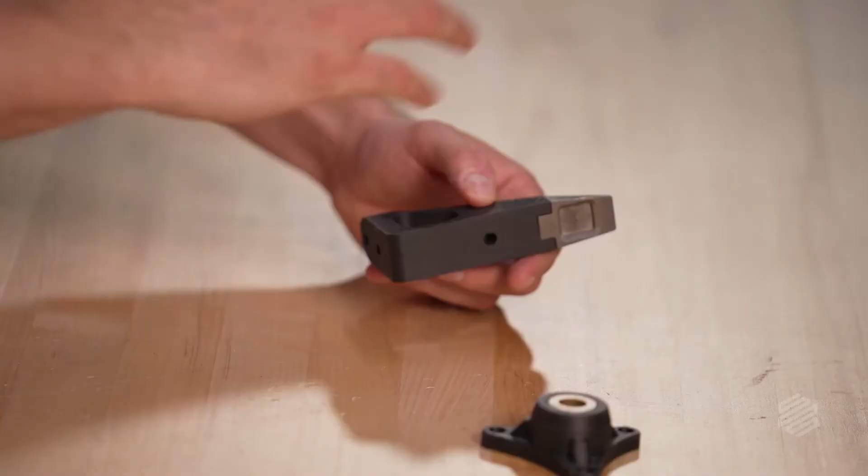Today we're going to be talking about strength, specifically how we can improve the Z-axis strength of our 3D printed parts. If you stick with us for a couple minutes, I can guarantee you that I can help you make some of your parts instantly stronger with just a little bit of redesign.

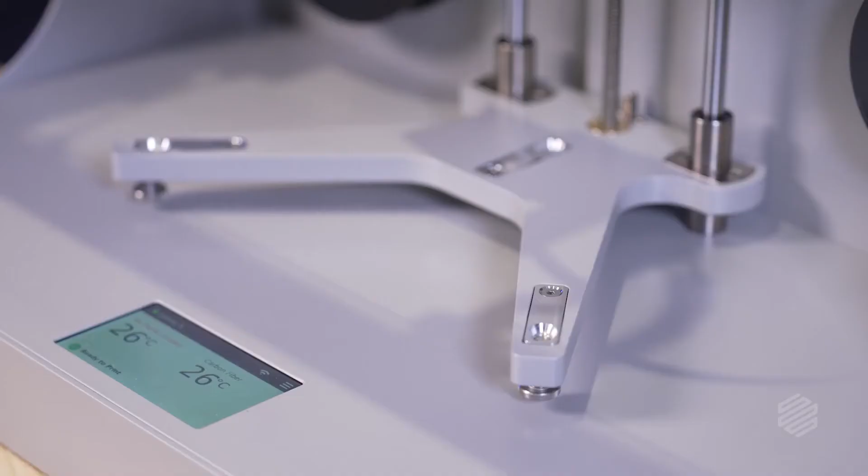So let's dive in. If you've been around 3D printing at all, you've probably heard that the Z-axis is weaker than the XY plane, or in each layer, of a 3D printed part. This can be a problem because you may not expect that part to have those different properties in different directions. You may expect to have a uniformly strong part.

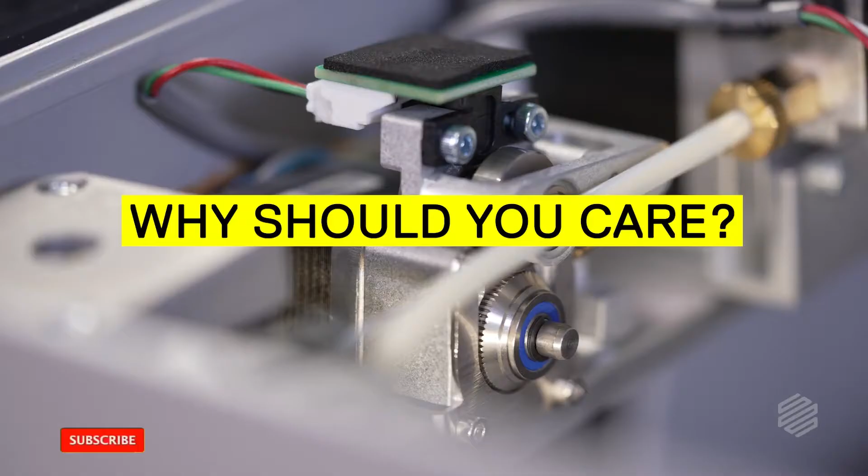So why should you care about the strength in the Z-axis? Well, you want to avoid broken parts. Imagine you were using a part like this and didn't realize that it didn't have enough strength, and you assumed it was going to work. All of a sudden when you put it into practice, it splits down the middle, cracks, and ruins your day. No one wants that, and that's why we need to think about how to reinforce those parts against those weaker axes.

Having stronger parts will mean that you can use 3D printed parts in more applications, give you more capabilities in those parts, and just generally make 3D printing a more useful tool in your everyday work.

So the first thing we need to talk about is this word, anisotropy: the characteristic of having different material properties in different directions or axes.

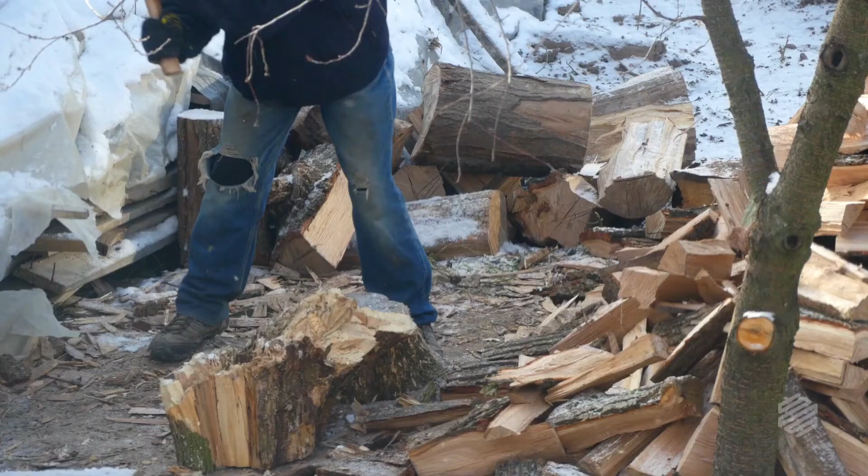A classic example of anisotropy is wood. Have you ever cut down a tree or split a log? If you have, you probably noticed that it was easier to split that log along the grain than against it. That's anisotropy at work. The wood is much stronger in one direction than another.

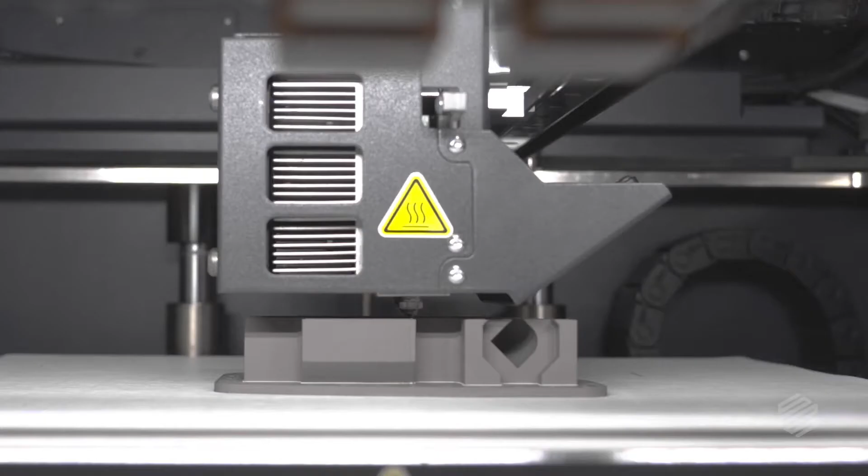Wood's just one example of anisotropy in nature, but you've probably run into others around you. And guess what? 3D printing is also anisotropic. I should be a bit more specific there, because there are some 3D printing processes that are more or less anisotropic than others. When we're talking about 3D printing today, we're going to be talking about filament extrusion 3D printing, like what you'll see with your Markforged machine, amongst others.

So if you're building a part layer by layer and extruding plastic or composite fiber into that part, you're going to see anisotropy between the layers. And this is where the classic example of 3D printed parts being weak in the Z-axis comes from.

So let's talk about why 3D printed parts have different strengths in different directions. It comes down to two things: material properties, and the geometric or physical bulk properties of the part. On the material properties side of things, we're really looking at how polymers bond together.

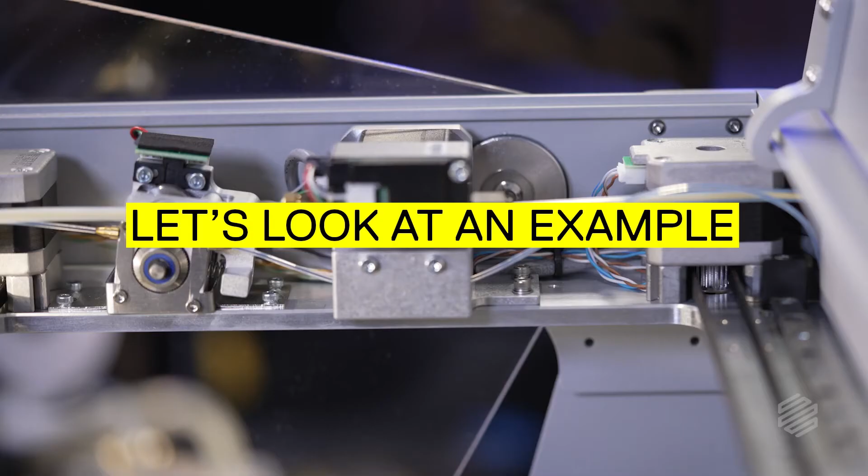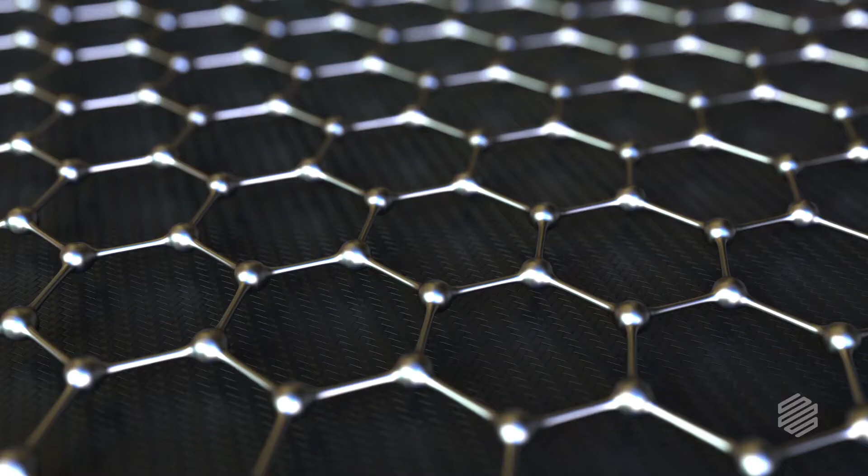Let's look at an example. We're building a part, in this case, out of a chopped carbon fiber and nylon material. Nylon's a polymer, and without getting too much into the chemistry behind it, that means it's a material made out of a lot of repeating chains of different chemical units.

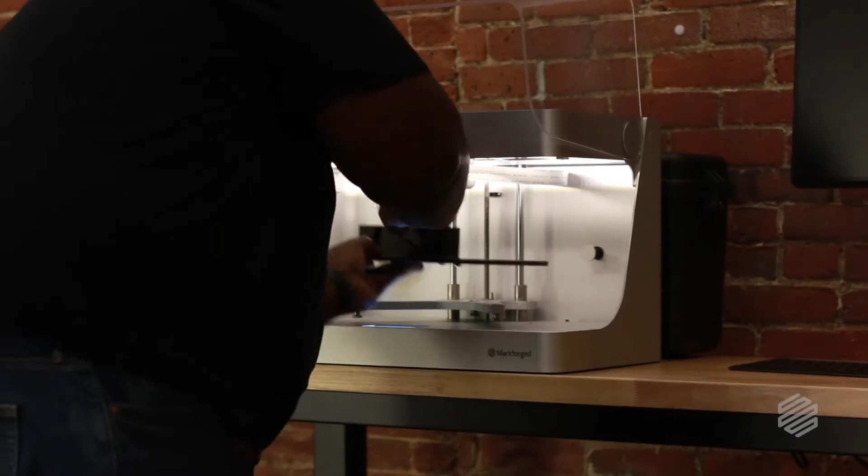And those chains, when you heat up that polymer and melt it, can actually entangle, and when it cools down, they're trapped together and form a really strong bond. This is generally what's happening when you lay down a layer of plastic in your 3D printed part.

Now the challenge is that if you fully melt the layer below it, you're going to turn your part into a puddle. So we have to balance the amount of melting that occurs between layers with preserving the integrity of the 3D printed part we've already done. That's the engineering trade-off we make in filament extrusion 3D printing. We're always going to have a somewhat weaker bond between layers than we will within the continuous extrusion path of a layer. Okay, so that's the first driver of anisotropy in your 3D printed parts.

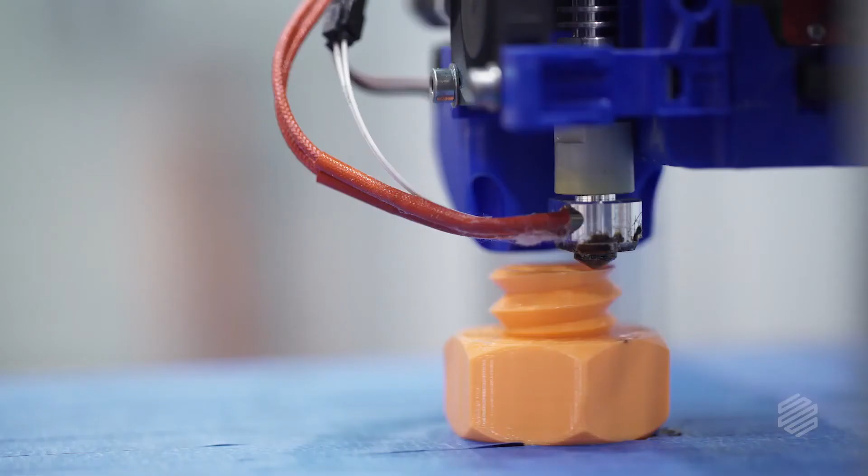But there's also a component that's due to the physical structure of the part. A couple areas here: one, we're building a part layer by layer.

So you've probably seen a 3D printed part and seen the layer lines, or the sort of scalloping effect, even if it's a very microscopic effect. If we apply a load to that part, those ridges and layer lines really concentrate the forces between those layers, which is the worst possible place for that force to be.

And because of that, that can act as a crack initiator, and it's the start of a part failing under loads or oftentimes impact. So the other thing we have to deal with is infill. For purposes of speed and using less material, most 3D printed parts are printed with a sparse honeycomb or triangular infill, but the downside there is you now have less material in that part.

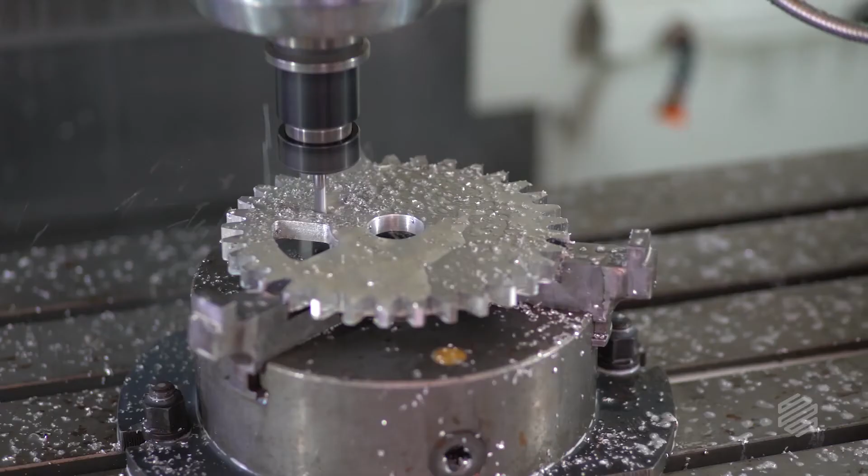So when we think about material properties of something like machined aluminum, it's often just a solid, homogeneous metal. With a 3D printed part though, because it's not solid, we also have to think about the strength properties that result from that infill. We have less material, so it's gonna have less strength in that area. And the combination of all of these things leads to anisotropy in our 3D printed parts.

So if we wanna make our 3D printed parts stronger in the Z-axis, we need to counteract the effects of this anisotropy. So that's what we're gonna do today. We're gonna talk about some strategies to reinforce your parts against these weaknesses that you see oftentimes in the Z-axis.

And that brings us to my favorite thing to talk about. So if you've been through our Markforged University course, you've probably heard me talk about functional requirements, but I'm gonna talk about them again. Y'all know I love functional requirements, and we're gonna do that right now.

So functional requirements are thinking about what it is that your part actually needs to do. What are the loads it needs to resist? What are the environmental conditions that it has to deal with? How does it interact with other parts?

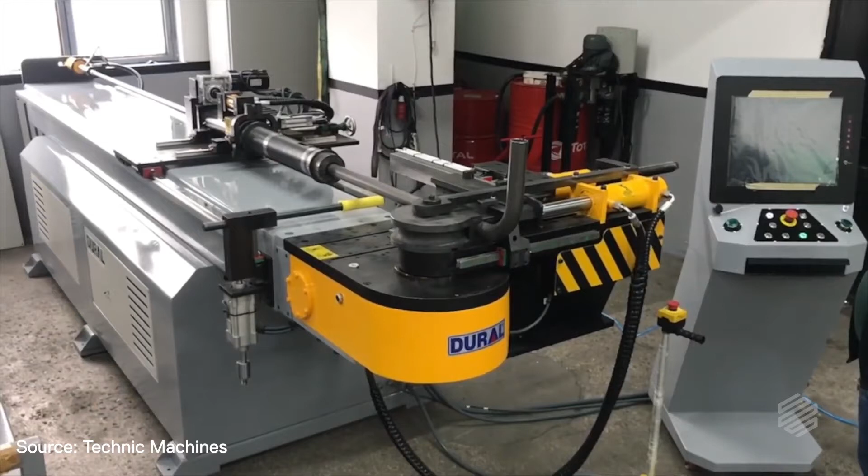As an example, I want to use this CNC bending die. CNC tube bending is a process where you use a CNC machine that can bend all kinds of different complex geometries into tubes and pipes. And a lot of times you'll need custom dies to get you the bend geometry you want. These dies can be expensive to machine and have long lead times.

So it does make sense to try to 3D print them if we can make the capabilities match the functional requirements of this part. So let's talk about what some of those functional requirements could be.

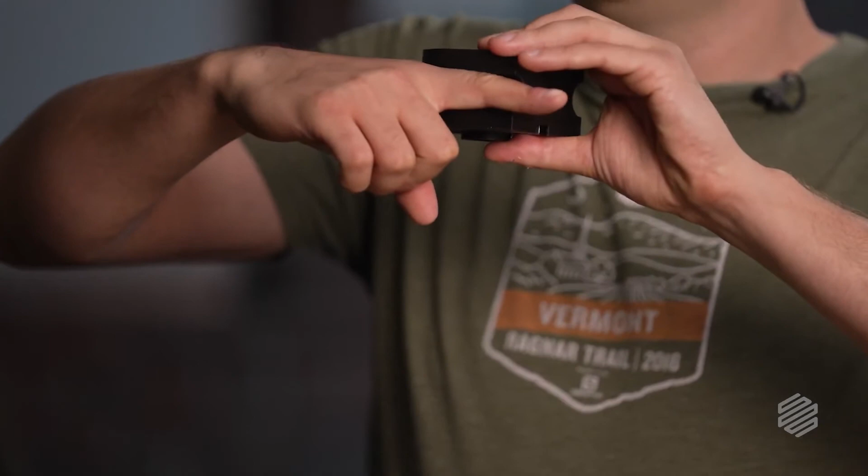So a CNC tube bender will take a straight tube and will bend that tube around this die. Those tubes could be steel, copper, aluminum, all kinds of different materials that can get formed by a machine like this. And depending on the material of the tube being formed, or the wall thickness and a bunch of other factors, there can be quite a lot of force on a part like this.

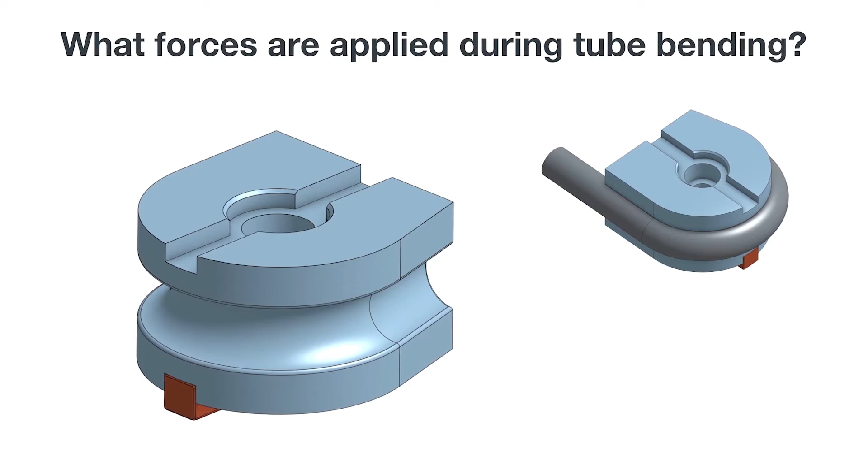So as the CNC tube bender forms this tube, it's gonna bring a tube in and then push it in against the die. And that's going to cause this die to want to separate or split in this direction.

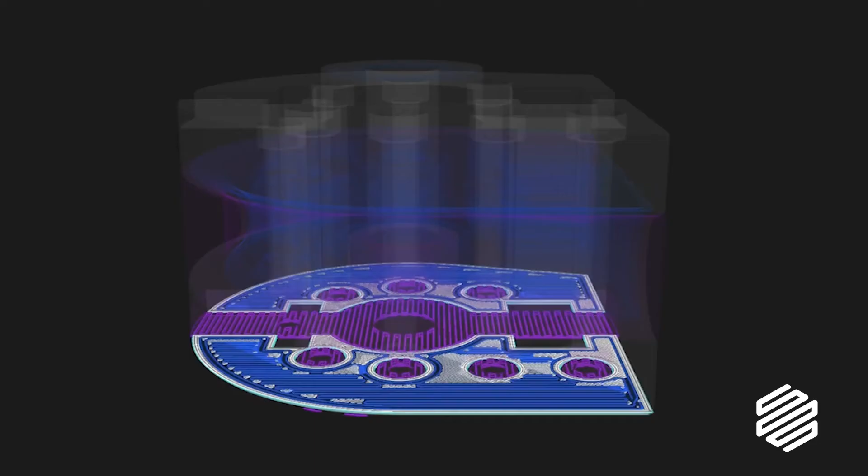So the first thing we want to figure out is where's my Z-axis? Because we can't know where the Z-axis or interlayer weakness is without knowing how this part was printed. So we want to know what's the print orientation. Well, in this part, we printed it like this on the build plate. So the Z-axis is going up this way, and our layers are stacked up and down like this. So that'll let us know where the layers in this part are and where that Z-axis weakness starts.

That means that our first functional requirement for a 3D printed CNC bending die is to make sure that this expansion force produced by that tube coming in doesn't split the part between layers.

So that leads us to our first strategy. If there's a force trying to separate the layers in the Z direction, and really it's producing an expansion force, the first thing we need to do is counteract that force. So we can do that with bolts.

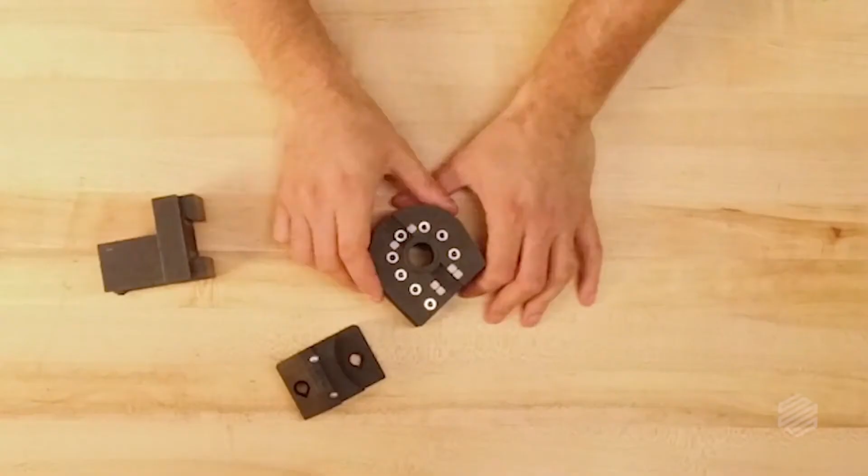Let's take a closer look at this bend die over here and see what that looks like. So you'll notice the first thing I've done is that I've put captive nuts in pockets along the bottom of the part. And on the other side, you can see that I've driven bolts all the way through the part that thread into those nuts.

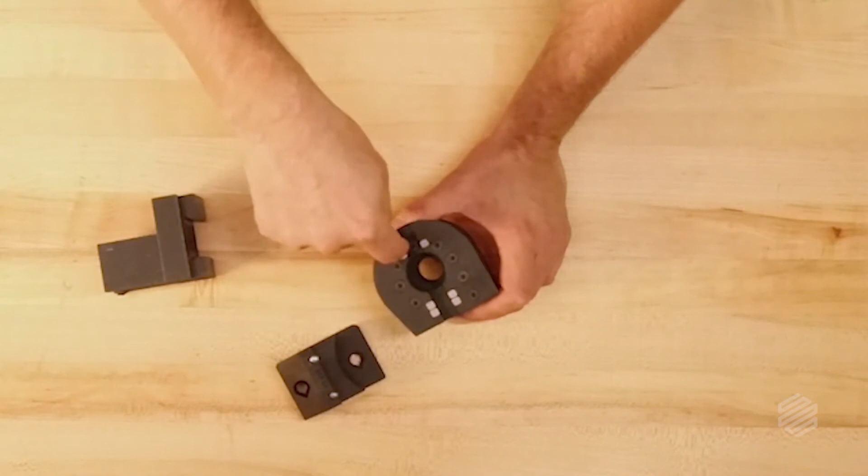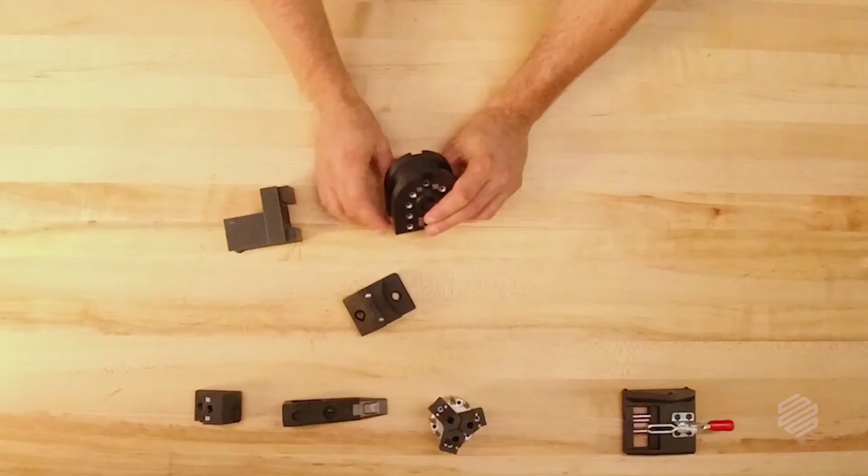These are really simple changes that I've made to the design of this part, and I've done them in CAD. All I did was just add some holes and the pockets for those nuts and bolts. The result of this is that I've added the tensile strength of those bolts to the overall Z strength of the part. And because those bolts are sandwiching this part together, they're actually helping also stop crack initiation at the bottom of this bend region.

So that's our first strategy to reinforcing parts in the Z-axis, which is simply to add bolts and nuts that compress the whole part together and add some compressive strength in the Z-axis to resist any forces that are going to try to separate those layers.

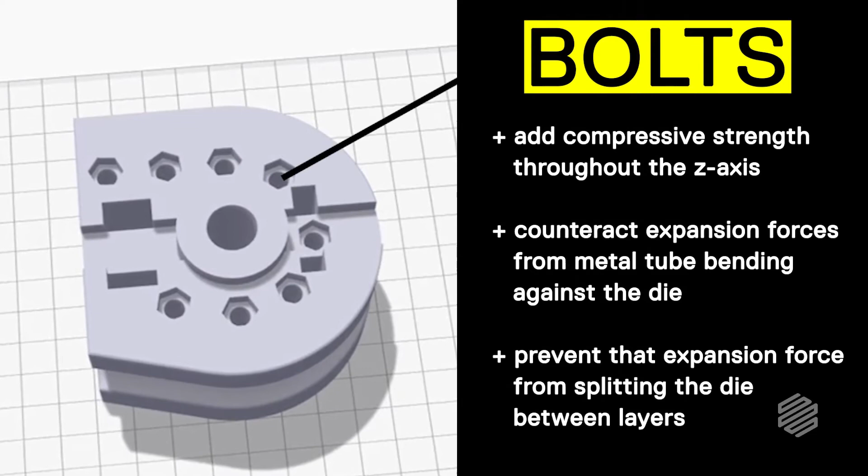So our next functional requirement in this bend die is to think about how the machine is going to transfer torque to the die and what the forces are going to be on the part with that. So let's take another look there.

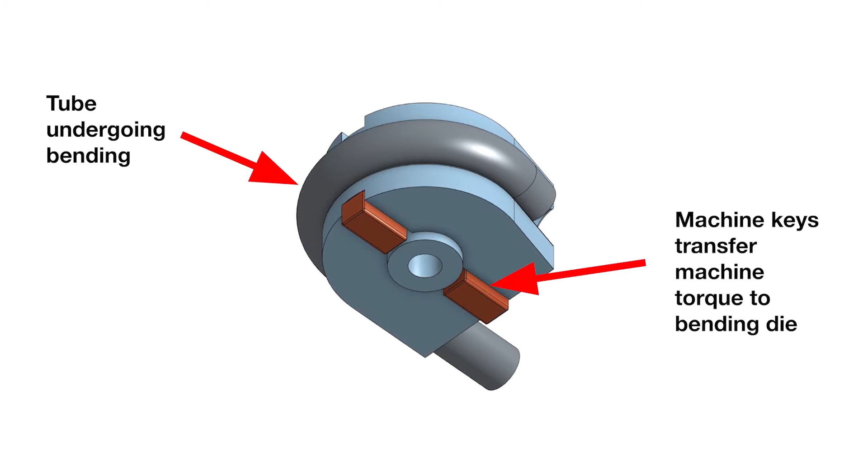The way that the tube bender applies torque and rotation to this die is through two machine keys that lay in this channel right here. As the machine applies torque and rotation to the die, those transfer that force and help rotate the die itself.

Now, the problem with that is the die was designed for a material like steel, which has relatively uniform strength all throughout the part. But we're using a 3D printed die, which has that anisotropy that we've been talking about. So we need to figure out how to resist against the forces that this die is going to see.

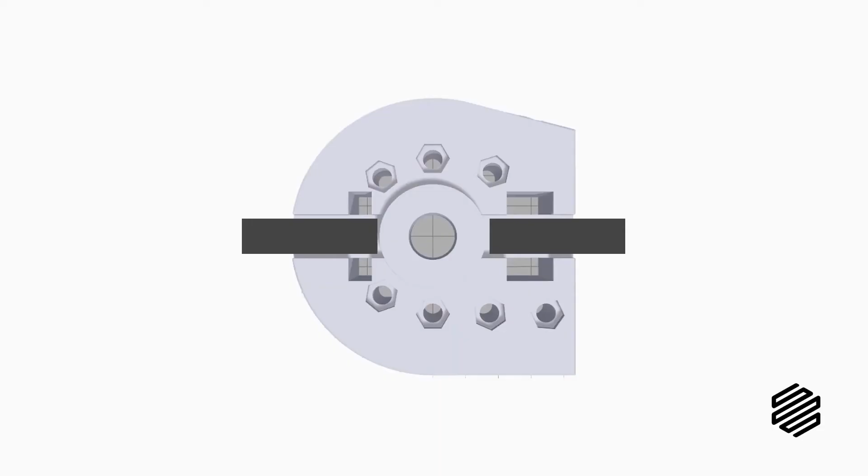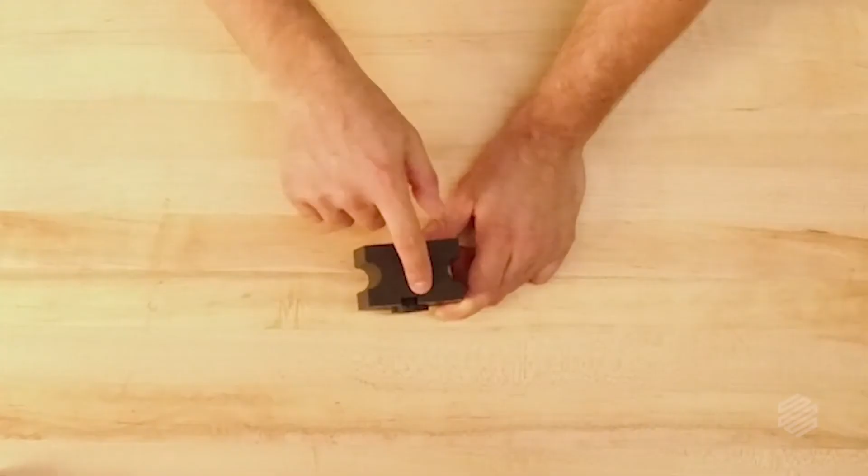Now, when those machine keys exert a force on the die, they're really only exerting it on a small region of layers near the top of the part. And the problem with that is, as soon as the machine key stops, it's basically causing a massive shear force at that bottom layer.

So as you might expect, if we didn't reinforce this die any further, that area right here would probably just shear off as that machine key pushed all that material over, because it's really only focusing that force on this upper section of the die. And while it wouldn't split like this part did, because the force in this example was top to bottom, it would still kind of just slide off that layer or try to push off that section of layers.

So we need to find a way to take this local force that's all in shear and distribute it out through as many layers as we can in the z-axis so that it doesn't cause the part to fail. And that's my next strategy for reinforcing parts between layers.

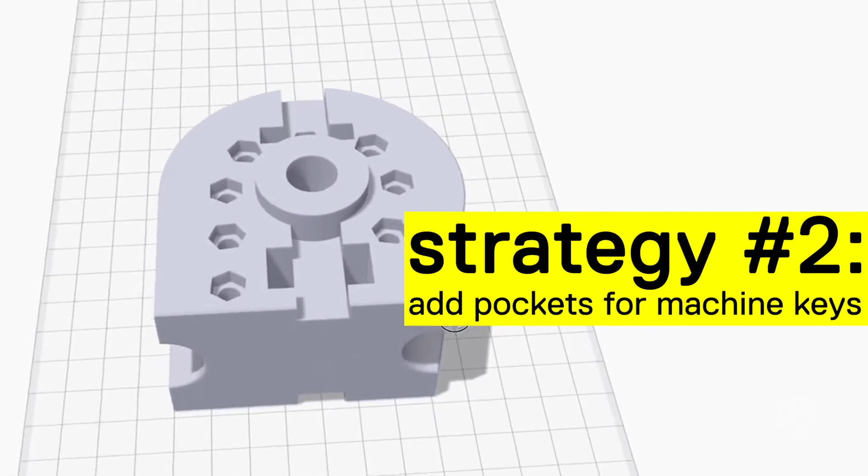You'll notice that I designed in machine keys of my own that run all the way through the part. These metal machine keys are the contact surface for the larger machine keys that are attached to the tube bender. So machine keys like this are a really cheap, easy off-the-shelf solution to adding flat surfaces which have metal properties, so wear resistance and strength.

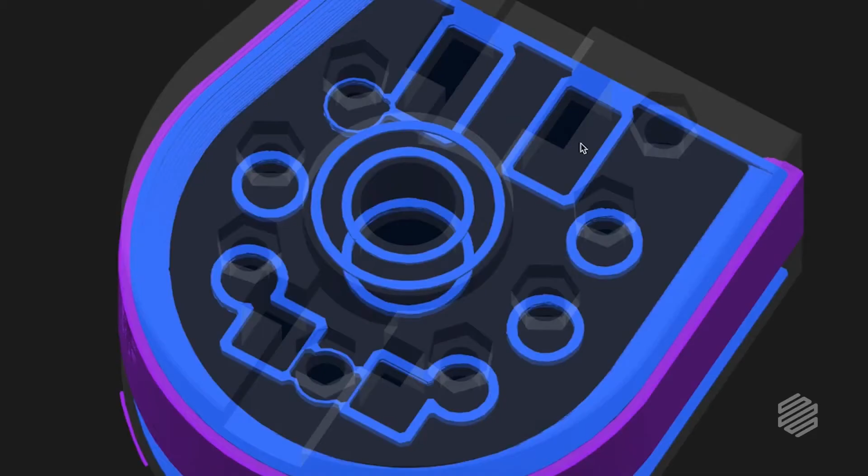And it's something that I use pretty often when I'm designing parts that need capabilities beyond what a 3D printed part can offer. So with these machine keys running all the way through the part, we now take that force, that shear force that the key from the tube bender would apply to the part, and it's distributing out over the entirety of the z-axis of this part.

That means that we're no longer seeing any sort of failure due to that torque.

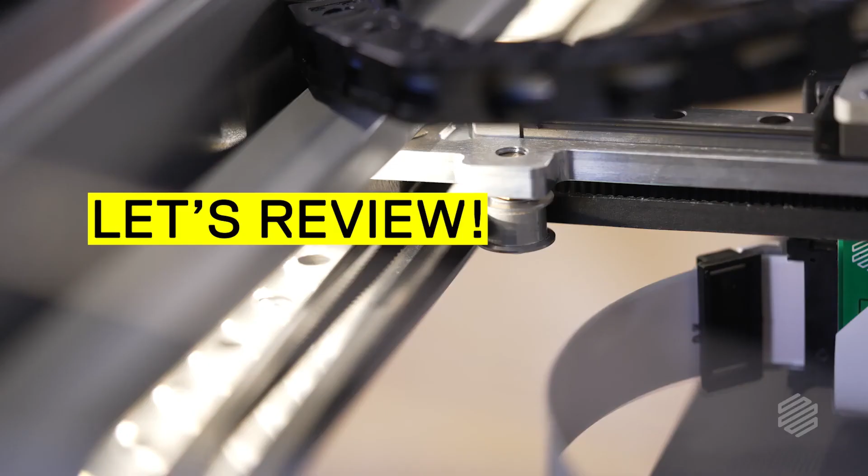So between those two solutions, bolts in the z-axis and then machine keys to act as that wear surface and that flat that also distributes out that shear force, we now have an effective solution that resists all of the forces and meets all of the functional requirements of the CNC tube bending die.

So we can generalize these types of solutions to other off-the-shelf components as well, all in the name of reinforcing your parts against their weaker axes.

An easy way to think about how to address the functional requirements of your part is to really think about the loads and forces and the things that it really needs to do. And then from there, take it a step further. What if this force caused this part to fail? If it did, how would it fail? And how would it deform or deflect or things like that? So it's a good thought exercise to go through.

And that's a good way to start thinking about how you're going to solve that problem. You'll walk through all those different functional requirements, think about how each one would impact the part, and then produce design decisions that can adjust or remedy those functional requirements, or address those functional requirements with a 3D printed part.